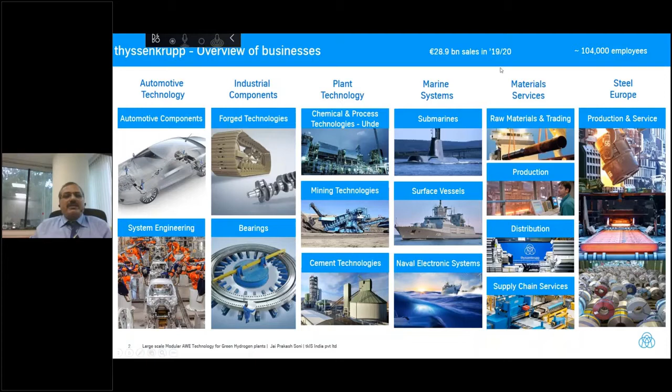Just to move forward, a small intro regarding our company. ThyssenKrupp Industry is a big conglomerate across various industries and fields, starting from steel, automotive, and submarines. But what is interesting for today's presentation is the plant technology, where we build chemical technology plants worldwide.

These chemical plants are built by the company in Germany, in Dortmund - ThyssenKrupp Industrial Solutions - which has the business unit called Uhde. You might be familiar with the old Uhde technologies. We are present in various chemical plant fields, starting from fertilizers, electrochemical plants, coke oven plants, and large scale plastic industries. The one connected to today's topic, on your left bottom, covers big hydrogen plants.

Of course, starting from the gray route, and the electrolysis plant, where we are now talking today to produce or utilize the green electricity produced. So these are the two vast fields where we have built umpteen number of large scale plants, both for hydrogen, downstream of hydrogen, and for electrolysis, which I will explain in detail in a few subsequent slides.

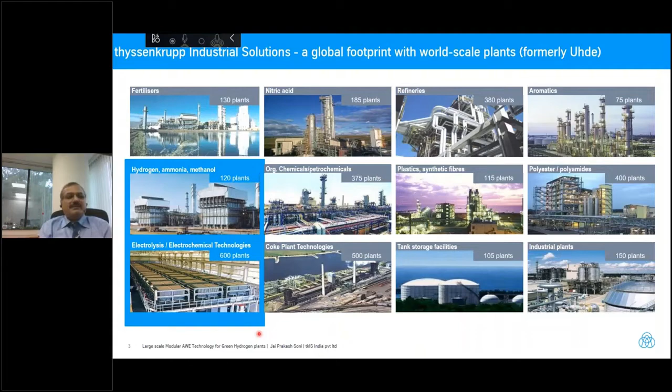Just before I start, an intro about our company in India. I belong to the company which is the subsidiary of Dortmund here in Mumbai, running for more than 4 decades. In Mumbai and Pune we have two offices, and we have built more than 800 projects for India and globally.

Coming to the topic for discussion today, the electrolysis. The electrolysis part of various chemicals like sodium chloride brine or sodium potassium chloride brine - we are in this field for more than 50 years.

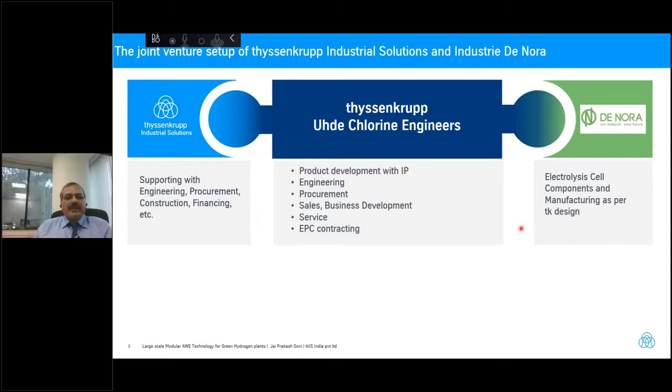For this, there is a joint venture between ThyssenKrupp and De Nora called ThyssenKrupp Uhde Chlorine Engineers, wherein the technology part is developed by ThyssenKrupp, and the cells are manufactured by De Nora Industry in Germany and Italy. With the help of this, ThyssenKrupp Uhde Chlorine Engineers is the market leader for electrolysis plants, be it electrolysis to produce caustic soda and chlorine from brine NaCl solution, or utilizing hydrochloric acid electrolysis to produce chlorine back into the system.

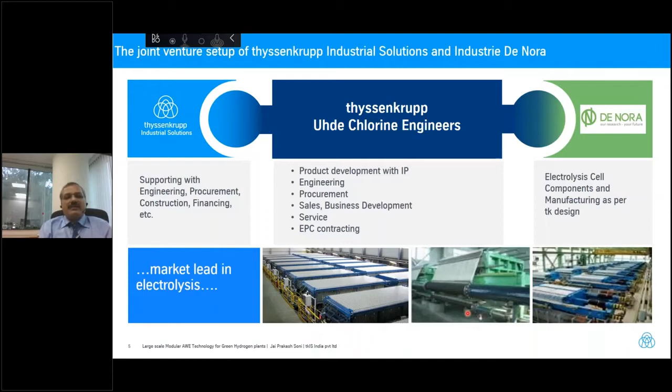So the electrolysis which we are talking about today, to electrolyze water and produce hydrogen, is very much similar to this technology. Because of our electrolysis experience with these two different technologies of chloralkali as well as hydrochloric acid electrolysis, we have developed this alkaline water electrolysis module, which we will talk about in more detail. The experience gained from these two technologies over the last 50 years is not less than 10 gigawatts of equivalent installed power.

The electrolyzers installed worldwide are contributing to a level of 10 gigawatts total capacity. As far as production is concerned, we can produce more than 1 gigawatt capacity equivalent per year, and more than 600 installations of these electrolysis plants already exist, of various capacities, starting from 20 tons per day up to 2,000 tons per day.

So this experience has been directly transferred to the water electrolysis module. We are able to offer, right from day one, a highly reliable element or electrolyzer design. Of course, this operates close to atmospheric pressure, so it is quite safe. The size of each element within this electrolyzer is large.

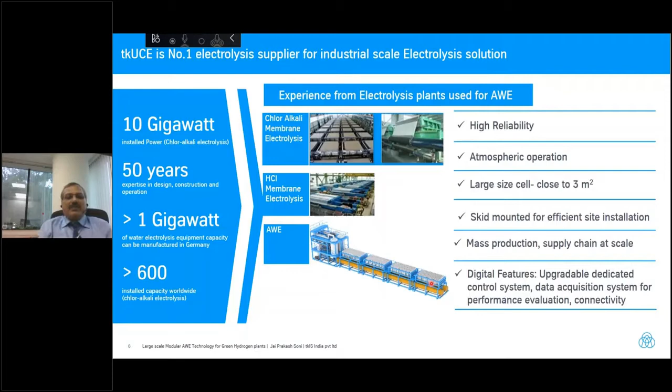Just to explain the concept, how does it work? Basically, alkaline water electrolysis is the electrolysis of an alkaline solution, which is KOH - potassium hydroxide. We have a cell or cell element where we electrolyze this KOH, and by passing direct current electricity through it, we produce hydrogen on the cathode side, that is the negative side, and oxygen on the positive side. This KOH is recirculated back, topped up by water. So if you see the overall reaction, it's electrolysis of water, which gives us hydrogen as well as oxygen.

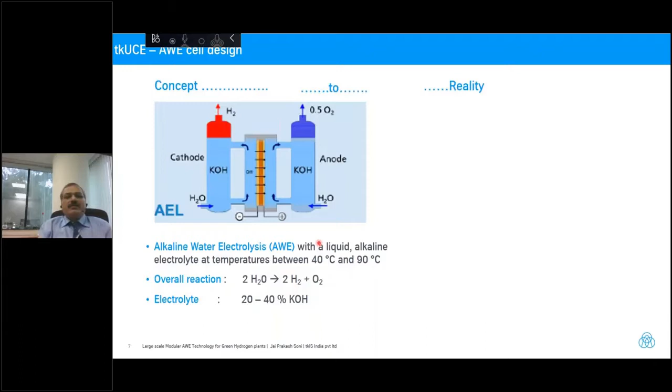So this is for the concept, but how to bring it to reality? In reality, we have the design of this cell, very similar to our caustic soda chlorine cell, made of complete metal. Both sides are made of nickel, basically cathode and anode, separated by a diaphragm or membrane to partition the cathode and anode compartments. This design is the well-proven zero-gap design of chloralkali experience.

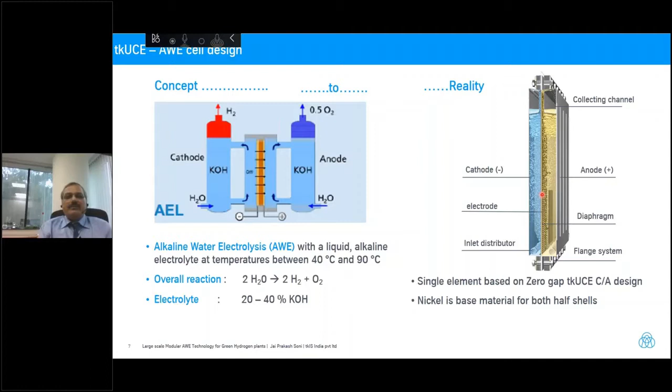So how do you translate this one element into one electrolyzer module? Here you can see this is one module of the electrolyzer, having almost close to 300 elements. This module is able to process 20 megawatts of energy. It's a 20 megawatt module with a very high stack efficiency of 82% almost, and the power to generate per nm cube of hydrogen is about 4.5 kilowatt hour per nm cube.

We get quite high purity from the module directly, 99.95% from the electrolyzer. After purification like deoxo and PSA treatment, we can go up to 99.999 or five nines purity as per the downstream requirement. Availability is quite reliable, with long time availability - more than 98% it can be made available throughout.

The cell life is very high. It's also quite fast reacting on power flexibility, so whenever there's fluctuation in power during daytime or nighttime based on renewable energy availability, it can be ramped up and down very easily. The technology is reliable, coming from decades of experience. It's fully automated operation, very little manpower required, and can be turned down to 10% capacity for hot operation. Ramp up or down from 10% to 100%, or down from a hot system, can be done within 30 seconds. From a cold start to coming up to capacity takes slightly more than half an hour.

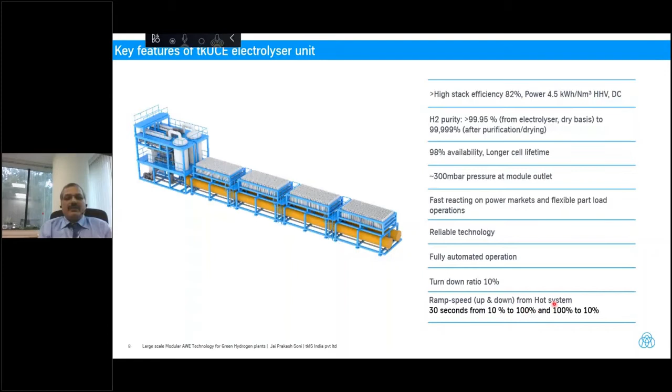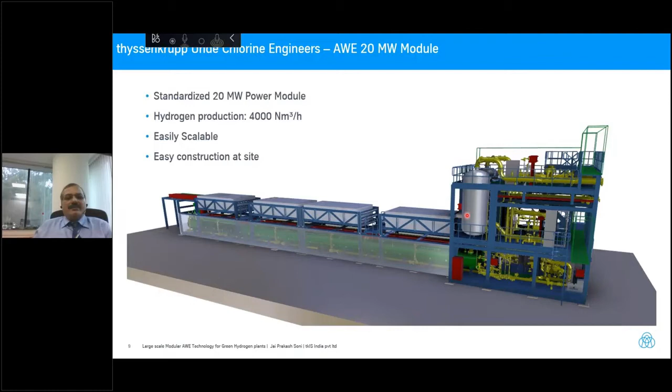So this is how this 20 megawatt electrolyzer module looks. This is completely modularized, and we have standardized this 20 megawatt module in order to get multiplication for higher capacity quite easily. So we have this module with the elements of the electrolyzer cell, and also the downstream and upstream equipment connected to this module. This complete set forms one electrolyzer module.

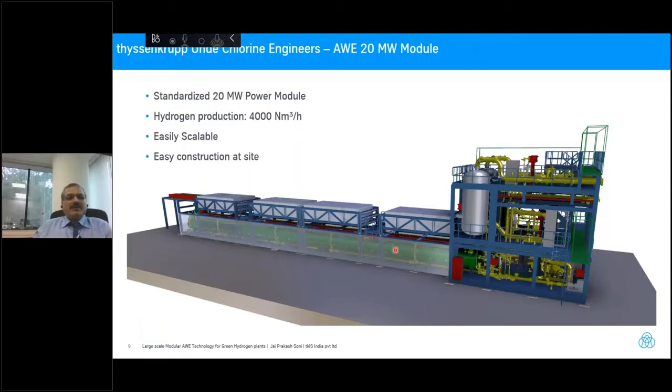Since this is modular and easily expandable, you can do scaling for the plant very easily. So from 20 megawatts, if someone wants to go 100 megawatts or 200 megawatts, it's simply replication. Because it comes in skid-mounted modules, it's easily possible to do the construction at site in a very short time.

This is just a glimpse to elaborate the capacity expansion possibility. If you simply multiply the number of modules as per the capacity required, you keep adding the electrolyzer modules one after the other, and we can achieve higher capacity. The downstream and upstream, located beneath or opposite to the cells, can also be expanded very easily. This gives a very good model for going for a mega or large scale capacity plant.

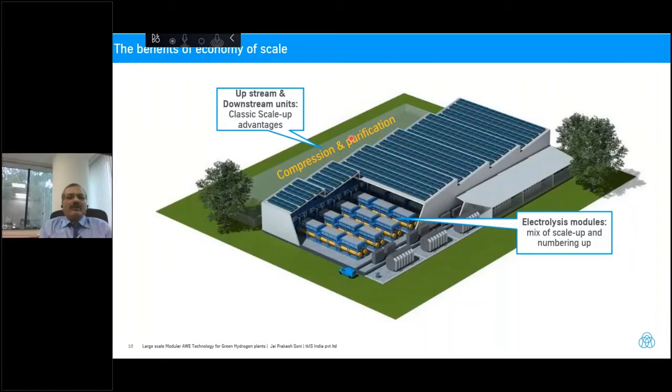Coming to the requirement - is green hydrogen the only thing required? As mentioned in the earlier presentation, the decarbonization or coupling of this hydrogen with downstream chemicals is very crucial for the economy of this hydrogen. Simply because transportation and value addition become very easy once we convert this hydrogen molecule to further chemical molecules.

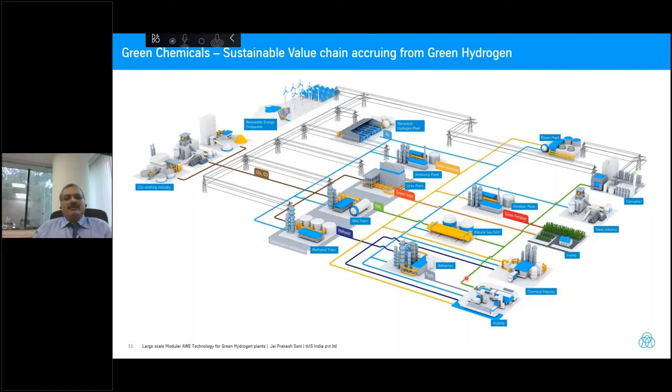If any part of the renewable energy can be converted into green hydrogen, this green hydrogen can be combined with various technologies which we have already developed and demonstrated with numerous plants to produce green methanol or green ammonia, which can be further utilized to produce urea and go for fertilizer as a completely green chemical, or methanol, which can be used for downstream refining and further fuel applications. So the transportation and selectivity or utilization of this green hydrogen becomes very powerful. Our experience can be combined here too.

Just to give you a couple of examples, in the first presentation of Power to X, we saw a short summary about these downstream chemicals. As I explained, the electrolysis which produces green hydrogen can be combined with any CO2 coming out of emitting industries like steel or cement industry, and this carbon can be captured to form methanol along with this green hydrogen, which can be used as green methanol directly.

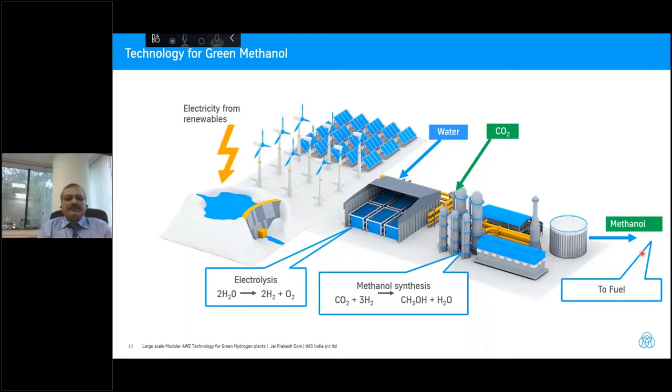Also for the ammonia, as I mentioned, we combine the green hydrogen coming out of this renewable energy and the nitrogen from the air, and you get CO2 neutral ammonia, which is today produced via the synthesization of fossil fuel basically all over the world. And this ammonia can be further clubbed with the CO2 coming out of the carbon emitting industries to form ammonia urea, which can be utilized as a fertilizer, as a green fertilizer without any hesitation.

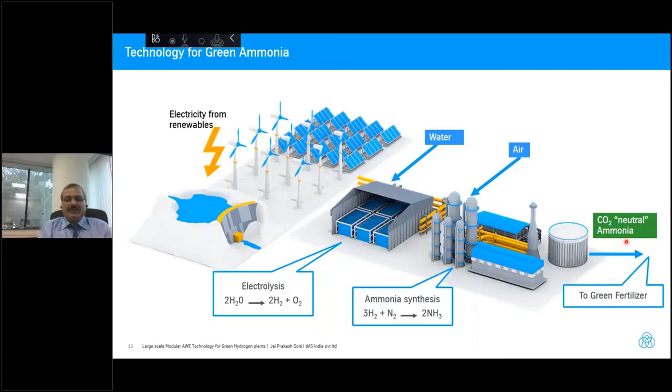So these are all about the technology or the experience which we have, but the proof is in the form of the actual installation. Since this technology has been developed in Germany over the period of long experiments, the pilot facility was installed at our own ThyssenKrupp steel plant in Duisburg, which is called Carbon to Chem project.

Here what we have done is we have installed this 2 megawatt electrolysis module in that complex to produce hydrogen, and this hydrogen was produced by renewable energy in that area, by wind energy produced. So this green hydrogen was combined with the synthesized gas coming out of the steel industry to form methanol. And we also produce in this plant ammonia by taking the nitrogen from the air.

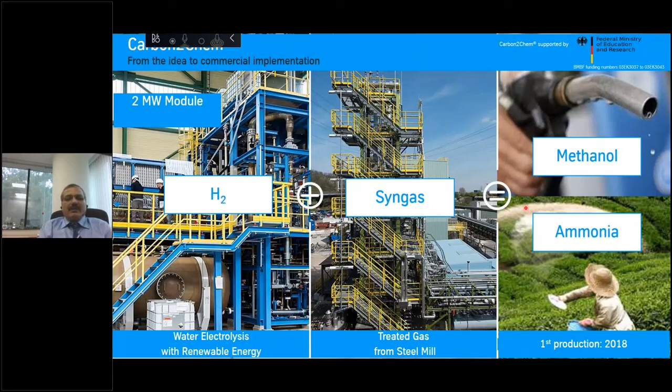So this is the demonstration facility which was installed right back in 2018, late 2018, and since then it is working perfectly in that complex. So based on this experience, of course, we didn't stop and kept on continuing, and I will share with you some of the projects which we have won or which we are currently executing all over the world.

That is only a few plants list, apart from the complete list which I am sharing with you today. And these are all large scale or mega scale plants which we are able to produce from our technology.

So the first one is from Canada, wherein we are executing in the early engineering phase the green hydrogen from the hydroelectricity renewable energy form. And the capacity of this plant is to capture an 88 megawatt module. So from our system it is installed. This green hydrogen will be utilized to produce green methanol, ethanol, and other biofuels basically. And the oxygen which is coming will be used to incinerate the waste from the city basically.

The next plant is in America, USA, Donaldsonville, where we have already built a big fertilizer complex some years back. And in order to utilize the green power or decarbonize their facility, they are installing a small electrolyzer as a test case, which is a 20 megawatt module electrolyzer. So we are installing one module there in order to utilize this hydrogen and produce ammonia, and this ammonia will be utilized directly in their ammonia complex. Of course, this is a smaller capacity as compared to the complete ammonia production facility, but after this demonstration, they will be adding more modules in the future, basically.

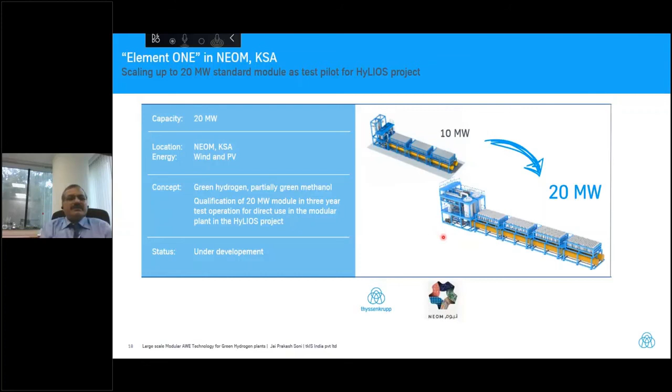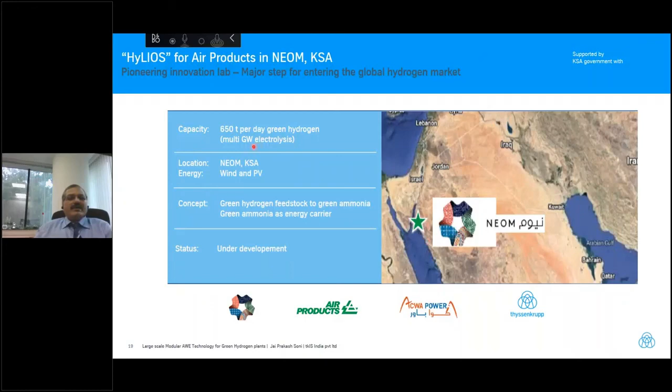Just to explain, after the testing or the completion of the previous electrolyzer, we have already started the early engineering, early part of the engineering, but at the end the capacity will be in the range of almost 2 gigawatts.

So just to summarize, hydrogen is currently associated with high carbon emission because it is currently produced via the gray route from fossil fuel in a major part of the world. But with the help of renewable energy utilization and water electrolysis, I'm sure this industry of green hydrogen production can decarbonize the complete hydrogen production. Not only that, this is a very good source of energy storing or transportable, either in the form of self hydrogen or after the conversion of this hydrogen molecule to the downstream value-added molecules.

It can be very much helpful, and not only helpful, but it will help in achieving the decarbonization of the complete sector. And of course, ThyssenKrupp is the front runner for the technology, not only for hydrogen, but also based on the experience, our experience from the various electrolysis designed for chlorine production or hydrogen production.

This technology, of course, is reliable, highly efficient, and because of this 20 megawatt module, higher capacities can be achieved by simply multiplying these modules. Not only this, ThyssenKrupp, with the experience of downstream products like ammonia and methanol, can easily couple this green hydrogen to produce green chemical molecules downstream.

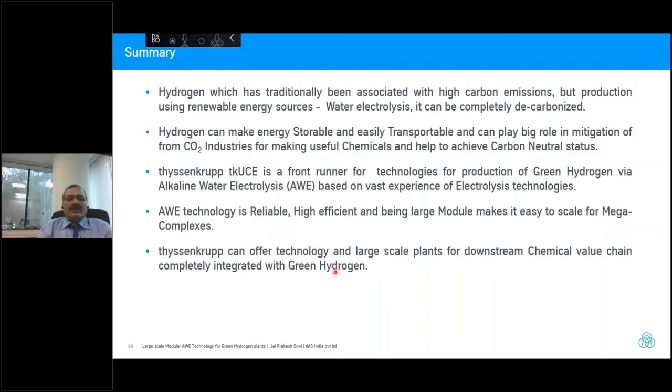So that's all. This is coincidentally the year of celebrating 100 years of our foundation. Our company in Germany has already completed 100 years this year. So thank you very much for your attention, and I am open for questions at the end, as Tobias said.